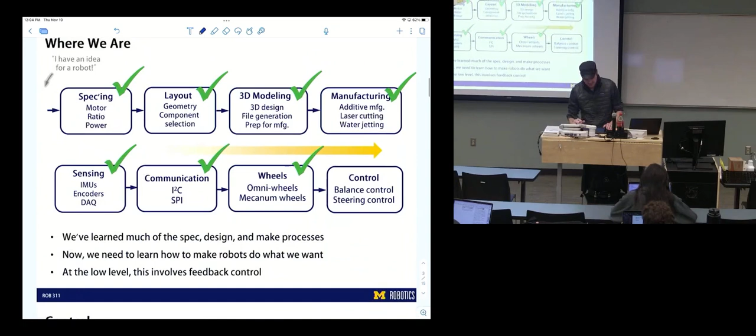All right, this is where we are. This is pretty cool, I like this slide because it shows everything we've done. It puts this whole problem of designing, making, and controlling robots in perspective. We've done all these new things, and now we're talking about control.

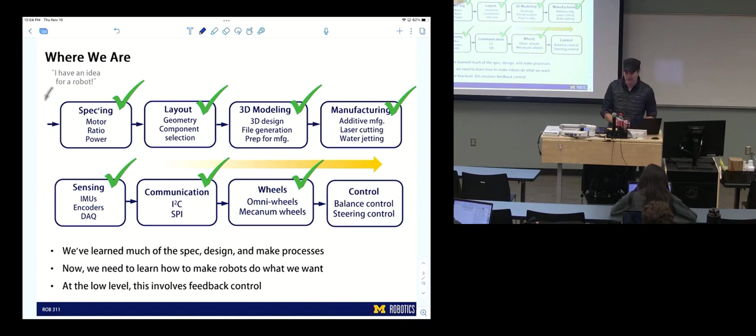We're going to mostly talk about what I'm going to call low-level control. Low-level control is really, what would you say if I say we're going to talk about low-level control, what do you think its job is? It really has one job. What is the job of a low-level controller?

See if I can give you help.

What is the job of a low-level controller? The controller should track the reference trajectory. It tracks references, that's its only job. You give it a reference, its job is to track that reference. What that reference is changes, and that changes the type of controller it is. What you're controlling changes, and that changes how difficult it might be to track a reference. But the game is track a reference signal.

So let me describe that differently. What is the job of low-level control? Track a reference trajectory. What are some examples of tracking controllers? I have four listed.

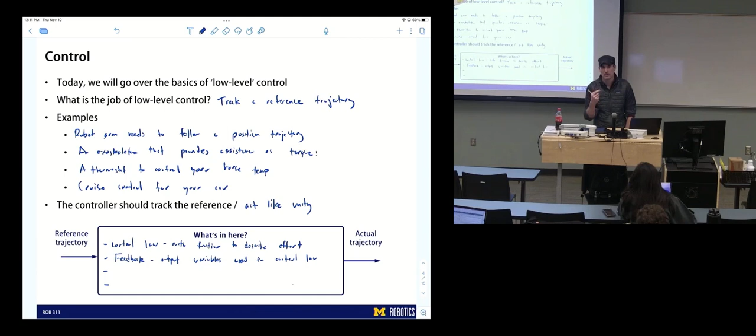Then there's two other things - these two things together are called the plant. A physical process is one, yeah - there's a process and the actuator. So the actuator is what's producing the effort - I'll say the system that produces effort. And the process is the physical system being controlled.

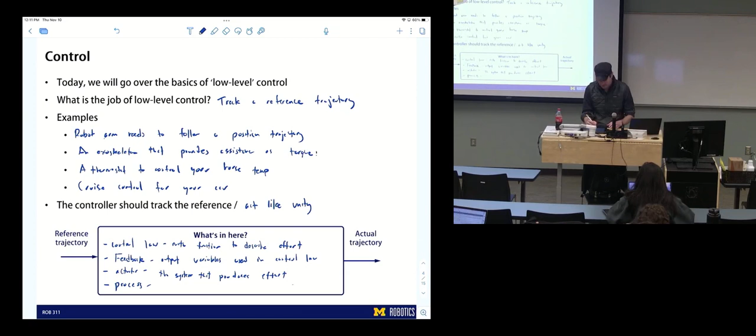Okay, now what do I want? So there's things going on inside this block. This is going to be our controller. What we want is this reference trajectory to match the actual trajectory. That's a perfect controller, so we want all of these things to create a gain or a multiplier of 1. If they do that, it's working well. You track that?

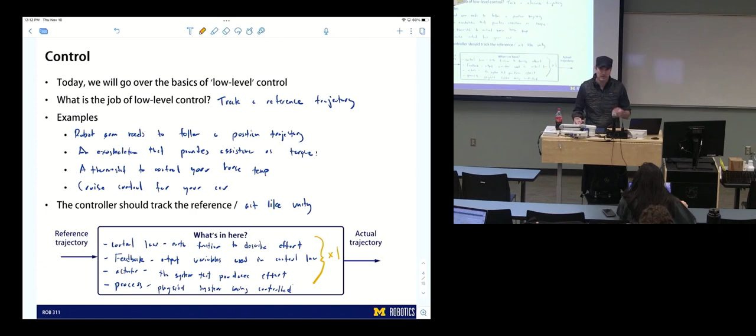Well, I want this to be times 1. Does that make sense? Okay, that's the game. How can we create a system that creates a unity gain under these different types of situations, interacting with physical systems, disturbances?

So why is it hard to make a controller act like 1? Yeah, usually it's difficult to get the transfer function, and on top of that, if you even if you don't have the model, you can still approach it a different way, but you have to know how to do that with Bode plots and everything. Yeah, we might end up going over Bode plots. We'll see how this goes.

I want to say it's hard for it to act like 1 because these systems have delays. They're ordinary differential equations. Those differential equations add delays or lag. So each one of these blocks is an ODE that maps the input to the output.

Let's think of an example ODE, for the actuator. Where would it come from? Actually, let me just write in these blocks real fast. So this is our control law. It's an ODE. This is our actuator dynamics. It's also an ODE. Process dynamics.

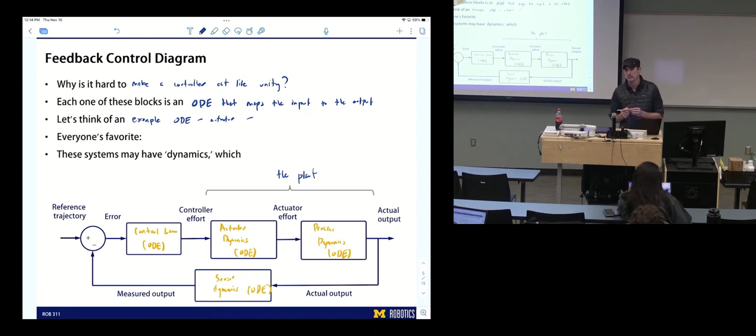Okay, so let's say we want to figure out what is that ODE. What's in that block? What's an example? PID loop? No, what we're talking about here is the actuator, the physical thing that produces effort. We spent a lot of time talking about that at the beginning of the class. What is this ODE? It would be the coupled differential equations, for example, a brushed motor. So that's going to be a set of differential equations that maps a controller effort, that would probably be a voltage or a current, to actual effort, which is going to be torque. So we would get those equations, the actuator dynamics, from our understanding of its underlying governing equations.

How about process dynamics? Where would it come from? What's the governing differential equation that maps an effort to motion? Yeah, dynamics equations that we made for the ballbot. And we have one that keeps coming up. What do we call that? That's a common equation, everyone's favorite. Newton's law. Okay. So this equation is going to be a differential equation that comes from Newton's second law. This is going to be a differential equation that comes from the governing equation of the actuator.

How about what's going on here? What is sensor dynamics? Does that have a differential equation? Does this seem like it fits with these two? Does it seem the same to you, or does it seem different? Who thinks it seems the same? Who thinks it seems different?

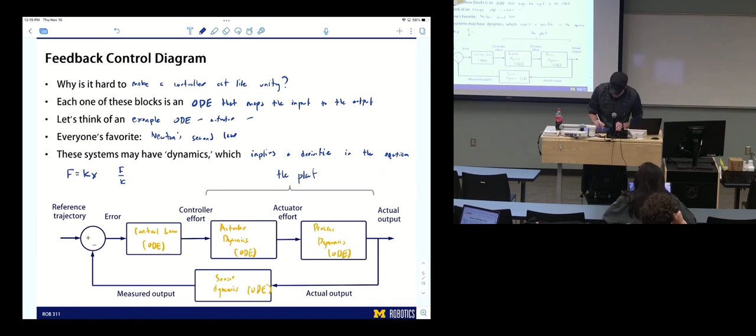Do all systems have dynamics or derivatives? Let's think about the governing equation. We're going to say the process is a spring. The actuator effort is a force. And we want to control motion, we want to control displacement.

Does this system have dynamics? Do they have derivatives? No. So a spring, if we're talking, it's just the force maps directly to the displacement through the stiffness coefficient. So if I force a spring, it's going to respond infinitely fast. It's going to deflect with the same rate that force changes, because there's no dynamics in here.

If we added mass to the spring, and now the spring has mass, then that would add dynamics, it would add delay. But generally in mechanical engineering and robotics, we would say they're massless springs. There's no dynamics here.

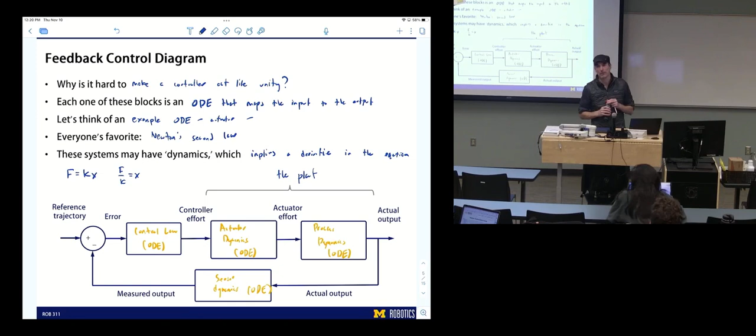Actually, in all physics and dynamics courses I've taken, obviously we assume massless springs, but when you're actually modeling systems in real life that require springs, do you also assume it's massless? Yes. The mass of a spring is usually so low that it isn't worth the complexity. It doesn't really change the answer.

So if I push on a spring, so I'm pushing on the spring, its displacement, does it track perfectly with the force trajectory? Assuming that the spring is the only force, but in reality, assuming a massless spring is the only thing, so if I push on it, it deflects instantaneously. There's no lag between the force and the response.

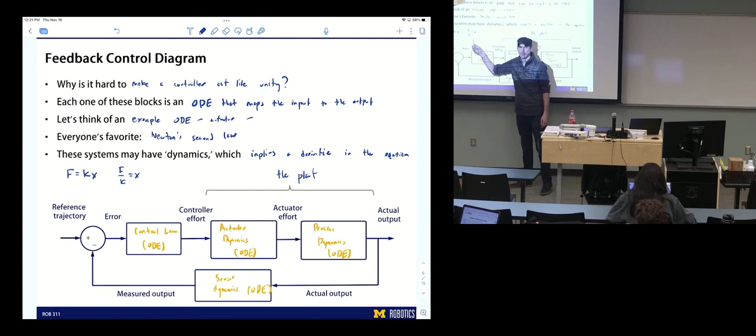Agreed? That's only true for certain systems that don't have derivatives in these equations. As soon as there becomes derivatives, systems start to have lag. Let's talk about that a little more.

This is a concept called system dynamics. We kind of touched on it a decent amount when we were doing the initial modeling. And it comes up more because control is really a ton about controlling the systems, and the system dynamics play a huge role in that. In addition, controllers have their own dynamics and can be thought of through the same lens. So that's kind of why this is coming back up. It's really, really important in the concepts of control.

If a system has dynamics or ODEs, it will often have delays. This usually slows the system down. It can add oscillations.

We can view this behavior, this concept, by thinking about or investigating a system's impulse response function, called an IRF. Who's heard of an impulse response function? How have you heard about it? And what did they say about it? Or what do you recall?

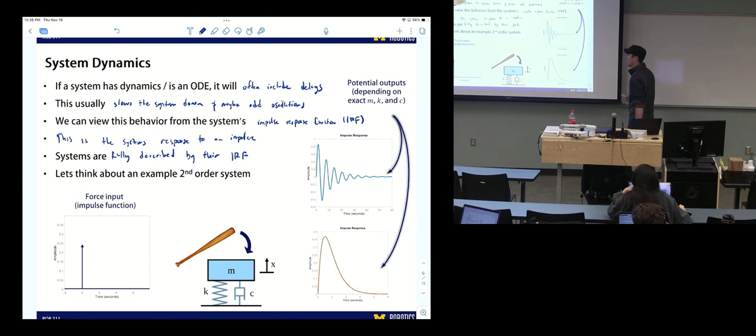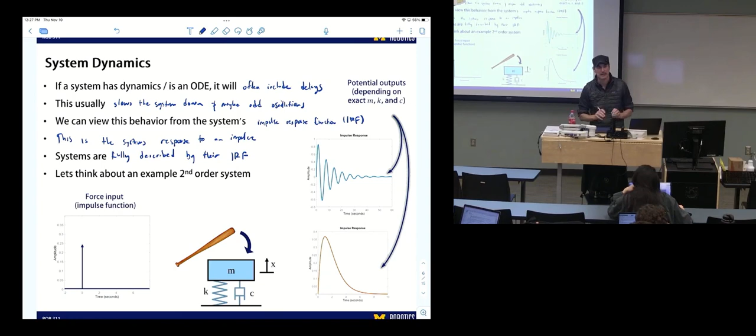So what this has told us is systems have delays. Those delays come from ODEs. We describe those delays using an impulse response function, where that helps us gain insight into the system. And an impulse response function is a key tool to predicting the output, which you won't really have to do, but I just want you to know that.

Okay, so this is our block diagram. I kind of want to go through these, like what these are. A control law is the ODE. I think you guys might know this already, this is kind of like just re-going over the same thing, but I think you guys are tracking it. Do you want me to go through these? It's sort of the same thing I was just saying about what these things are. Do you feel like you know what these blocks are? Who wants to see it again? Okay, let's do it. The control law is an ODE,

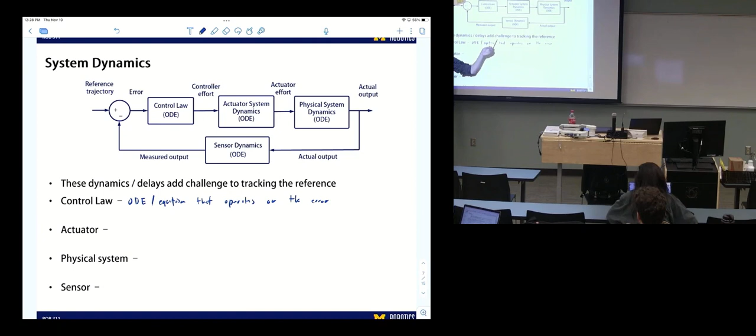Potentially, or not, but it's a math equation that typically operates on the error. In this block diagram, we have our reference trajectory. We're going to subtract our actual value from our reference. That's the error. So that means we wanted to be here, we're actually here. Now we know we're off by some amount. We're going to operate on that error as a set of instructions and then create effort to try to correct this error. That's the general strategy in control. We're always operating on error. We're going to create a strategy here that's just going to try to drive that error to 0. So control law is an ODE, an equation that operates on the error, often includes derivatives.

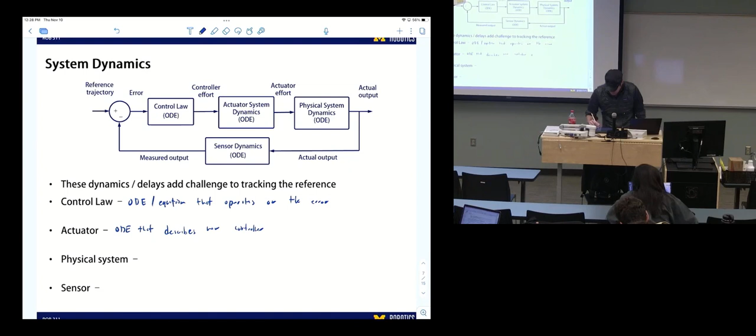The actuator is the ODE that describes how controller effort maps to actuator effort.

Is actuator effort a physical, real thing, or a thing that exists in software? It's a real thing. It's actually effort provided by the actuator. It's going to be torque or force, typically. The controller effort, is that a real thing, or is that something that exists in software? Software. I'm going to say it's both, because controller effort will be computed in software, but you'll also have something that you're sending out. A PWM signal, a torque command, a duty cycle, you have some physical thing that's going out, and then error. Software, that was only software. It only exists. You're going to compute it, you're going to operate on it, and then that's it. This is a real thing. Actually, your output is a physical thing. This is the measured version of it.

So going from the controller effort to the actuator effort, is that encapsulating all of taking whatever the controller, like PWM or whatever the controller gives, converting that into a voltage and current to give to the motor to move it, which will cause the torque or the force to happen? It would be the actual voltage or actual current. This signal would be either, usually it's a PWM signal, so usually it's a voltage value that's changing here.

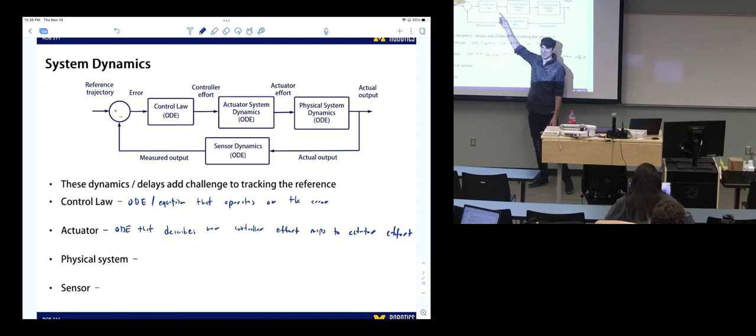So the controller effort would be a voltage value that changes. It does that conversion beforehand, and then the actuator system receives it and converts that into the actual torque. The controller effort is received as a voltage, and it has to convert that voltage into an effort. That comes from Kirchhoff's voltage law and your motor equations, which convert voltage into torque current.

So the control law is software. The actuator system dynamics is a real physical thing. The physical system is a real physical thing. And the sensor is a real physical thing. The error is something you compute in your software, but you won't actually see it.

Physical system, this is our ODE that describes how actuator effort is converted to motion.

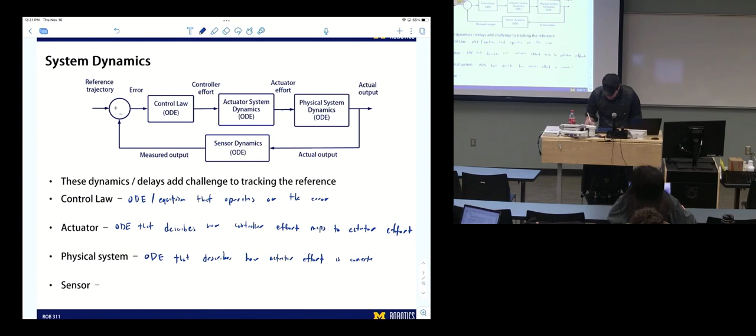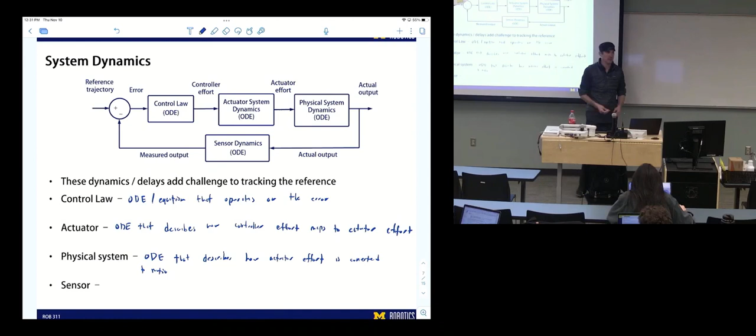My iPad just restarted, let's give it a sec. I can't actually use it right now, but the sensor is going to be the ODE that maps the actual change into the real change, or the real change into the measured change. While that's going, I'll just switch to my actual notes, and hopefully it'll come back. Oh.

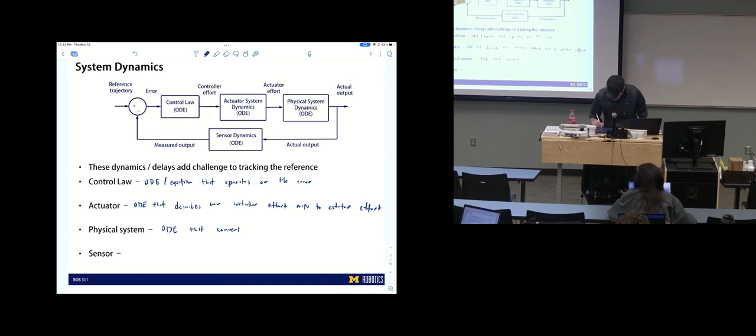Yay, all right, we're back. Okay, we lost the physical system. ODE that converts actuator effort into motion.

Can an ODE just be any differential equation, or are there specific parameters that describe it? That's a good question, I think you can generally think of it as specific parameters, although that'll be a good enough approximation. Are there certain differential equations that classify as ordinary differential equations definitely? That's a class of differential equations, but if you're thinking about what those dynamics represent, they might represent a set of dynamics that can be easily described by an equation, or something that's not so easily described, something that really exists as a function, as a frequency response or an impulse response function only.

The sensor is the ODE that describes how the output is measured.

Can you think of an example that illustrates how sensors can have dynamics? How about a microphone, or a speaker. We'll think of a microphone, it's a sensor. A microphone senses vibrations and converts sound vibrations into a voltage. Imagine at some point the mass of that microphone system, which will be a coil and a magnet, will start to eliminate or be slower than what is potentially being heard by the microphone.

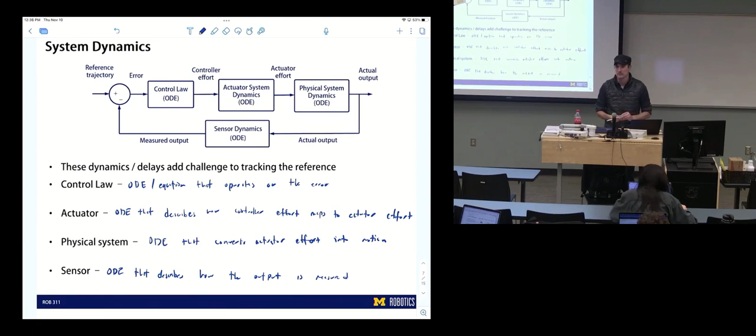Does that make sense? Does that kind of help? Would you consider, like in an IMU, the spring damper systems that measure displacement, would that be considered the dynamics of the sensor as well? Definitely, yeah, same exact concept. Anything that has mass is going to eventually have a bandwidth issue.

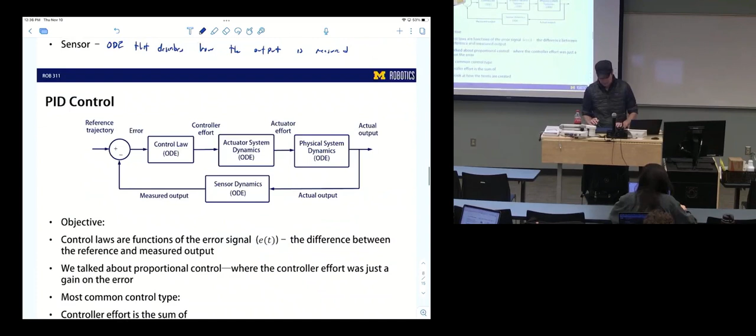Okay, so let's go back through this. The objective of our controller is to track a reference. It does that by driving error to 0. If error is 0, what's the gain of that system? 1. So anytime error is 0, the system has a gain of 1, agreed? It's doing its job. Anytime error is not 0, the system doesn't have a gain of 1 and it needs to catch up. Make sense?

Control laws are functions of this error signal, E of t, which is the difference between the reference and the measured output. Everything operates on that error. In lab, we talked about a proportional control type, where we mapped the effort of the balance controller proportionally to its lean angle. That was easy to do because it was trying to track a lean angle of 0, so all we had to do was take a gain, multiply it by the lean angle, and we got our controller effort. That was proportional control. There are also other types of control.

We're going to go over the most common type ever, which is called proportional integral derivative control, or PID. The controller effort for PID is the sum of 3 terms, one for each. Let's look at how these terms are created. Who's already very comfortable with PID?

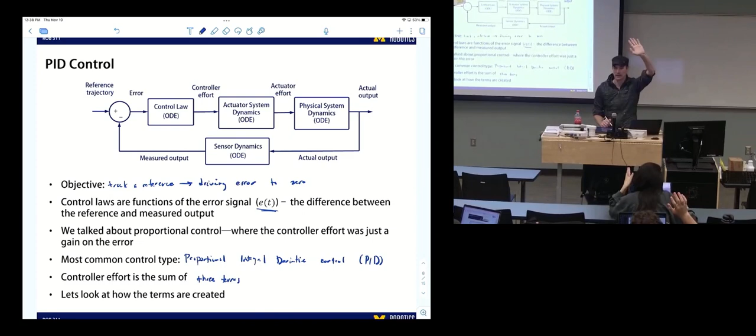Okay, cool, about half the class. That's not surprising, that's okay, it's a really common concept. But for those of you who are not as comfortable, we're gonna go through it.

Okay, so we have our block diagram up here, like we talked about. I've defined a couple of variables: error being E of t, the reference trajectory being R of t, and the output being Y of t.

So the proportional gain term is just this. The U is our controller effort, so UP is the part of our controller effort that comes from the proportional term. It's going to be KP times the error, just like we talked about for our ballbot. The error may, if you're not referencing 0, have to have 2 terms in there.

It acts like a spring, a virtual spring in position control. So that should help you understand: if I have a controller doing position control and its reference is here and I deflect the system, it's going to try to bring it back. It's going to drive that proportionally. That's going to come from this term.

The integral term is the integral of the error scaled by ki. So the u of I, this is the controller effort from the integral term. It is ki, its gain, times the integral of the error term.

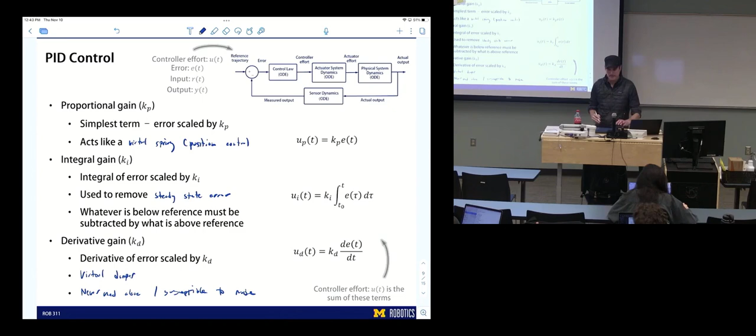Okay, this is a quick little example for us to do. What I have here is an example reference and an example output. What I want you to do is build the 3 controller effort terms and then create the total. It will take like 2 minutes to do this.

I'm going to try to get to this mallet example, I think we'll get there. I think we should do this, so I want you guys to create these. You should have 3 different curves. Those curves sum to a curve there, and we can talk through it. This will just take like 2 minutes.

I'm just saying, think of these gains as 1 for this little example. So r of t is what we're trying to do and y of t is what's actually happening, is that correct? Correct. So r of t is your reference, Y is your output.

Everybody should do this. If you cannot do this, then that would be an indicator that we're not where I want us to be. I'm hoping this would be relatively straightforward for you.

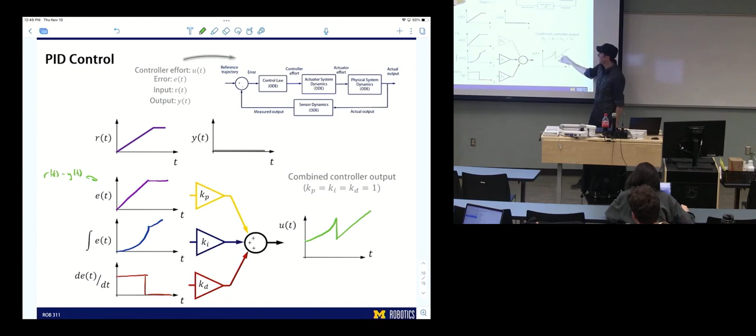So this first half is like the D term is steady, so that's why it doesn't start at 0, it starts where D starts. Then I kind of just combined these, but I tried to make it look a little steeper than this. It doesn't look like that, but that's the plan. Yeah, so this would be the combination of the purple and the blue. It's gonna make something like a parabola, but a little steeper, and then drop, and you have that linear increase. Yep, that's right, awesome.

So this is assuming that none of this is actually being applied to the system. Correct. So theoretically it wouldn't really look like this in reality, because you would have been applying feedback to it for it to rise up. Yeah, this is an inverse simulation. In actuality, it would be forward, so the u of t would have an effect on y of t, and that effect would have to go back into this calculation, but for this example, we're not talking about that.

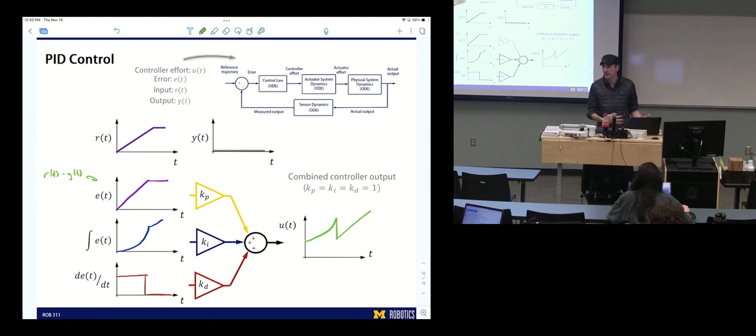Does everybody track what PID is, kind of where it comes from, how maybe you would implement it? Let's talk about how we would describe how good it's doing, how well your system is being controlled.

Okay, so coefficients, your P, I, or KP, KI, and KD, have to be adjusted, and that process is typically called tuning, and it's done iteratively. It's often, or maybe not always, but often done using a step response.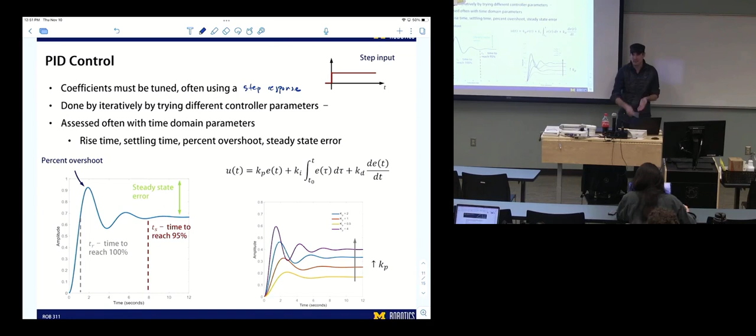A step response is the system's response to a step input. It's a really common way to assess how well a system can track a reference because it's high frequency, it's discontinuous, there's an immediate jump. That helps you see how well your system responds, how quickly it responds, and then you can see it kind of settle out. A step response would be sort of similar to, or analogous to, an impulse response.

There are these classes of responses that are used over and over in system dynamics. Step response would be one of them. We're going to use it to view our system and how well it's tracking, so adjusting our controller parameters—KP, KI, and KD—that's called tuning. You can assess them in the time or frequency domain. This class will talk about the time domain.

The way we would assess a system, how well it's doing, is by these kinds of variables: rise time, the time it takes to reach 100%; settling time, the time to reach 95% of its final value; percent overshoot, the amount it goes over the top of its steady state value; and steady state error, the difference between the reference and the actual value at time equals infinity. These are the kinds of things we'd use to talk about how well our system is doing. This is our vocabulary for assessment.

How fast does it rise? How fast does it settle? How much overshoot does it have? Oftentimes, if you're building a robot, you're gonna have some goals for this. These constraints—what do you want for this—will typically come from you. You might think of an example constraint that you might see when solving a problem.

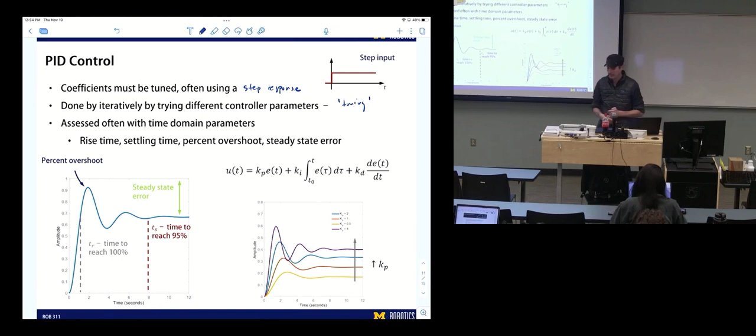So let's say we have a D term, and let's say I give a system a step response. What's it gonna do? Let's say it's only a D term—say I give a system with only a D term a step response. What would happen? It would basically kick forwards, and then it would stop. You would see that discontinuous jump as a kick forwards, and then that'd be it.

Okay, so let's talk about how you might adjust these parameters. We've talked about these controllers—they need to ideally create an overall system gain of 1. That's challenging because of disturbances, delays, or dynamics in systems. So we created this control law that had to do with driving error to 0, which would indeed make our system gain 1. But now we need to know how we actually tune the coefficients in that control law to drive error to 0.

There's no right answer to this. There are common best practices, which is what we're going to learn, but there isn't really a right answer to tuning a PID controller. It's really up to you.

The most common control tuning strategy is developed by Ziegler-Nichols. If you're interested in knowing that, you can click on that link, it'll take you to the Wikipedia page. We're not going to learn that formally. I'm going to give you the Cliff Notes version.

So when I'm tuning a PID controller, there's usually 3 steps. Does anybody know the first step? Start with the P gain and get it to rise up to the point where it at least hits the target, whatever it's called - the reference. Yes, so step 1 is increase KP.

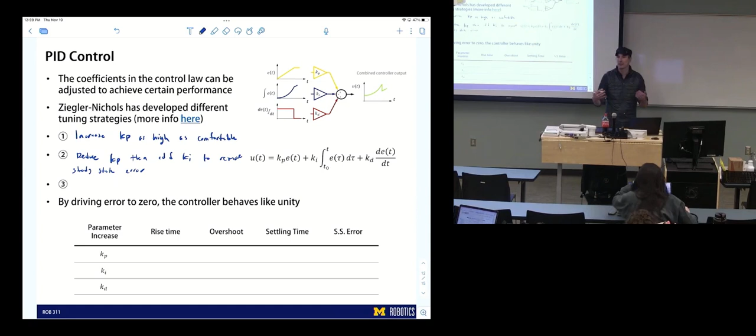So once you've done that, you usually have an idea of how much error is produced, how much effort is produced. You begin to see what your system can take, how much effort it can handle. I would do this even though I know I'm going to reduce it, just to see how the system responds and get an understanding of how much effort is going into that response, then I would add it. But you could shortcut it if you're proficient in this.

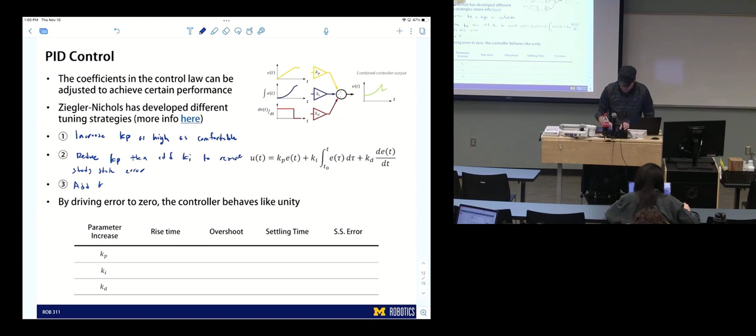Step 3, add KD to remove oscillations. By driving error to 0, the system behaves like 1.

Okay, so now I want to go through this little chart, and I want you guys to tell me what the answers are here. So I'm going to talk about increasing KP, increasing KI, and increasing KD. I want you to tell me the effect on rise time, overshoot, settling time, and steady state error. Not all of them have a strong effect on all the parameters, but we'll do it together. Rise time - what's rise time?

How quickly it passes its desired value - that's rise time. So if I increase KP, what happens to rise time? It decreases. What happens to overshoot? It increases. What happens to settling time? It does increase, a small increase, but not as fast as everything else. Steady state error - if I increase KP, what happens? It decreases.

Does that make sense for steady state error? Imagine KP is essentially a spring connected to the target, to where I actually am. As I increase KP, that spring draws closer and closer. Will it ever reach? No, it wouldn't. So a P-only controller will never have zero steady state error.

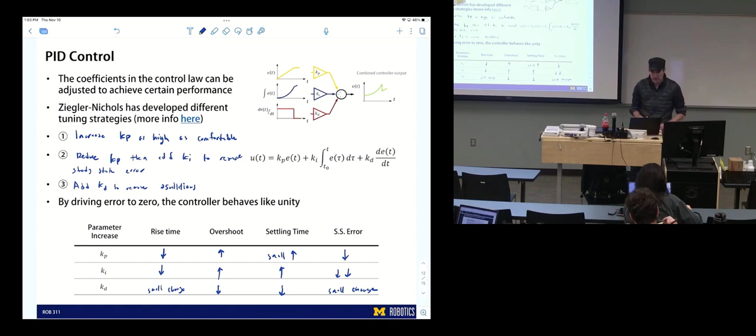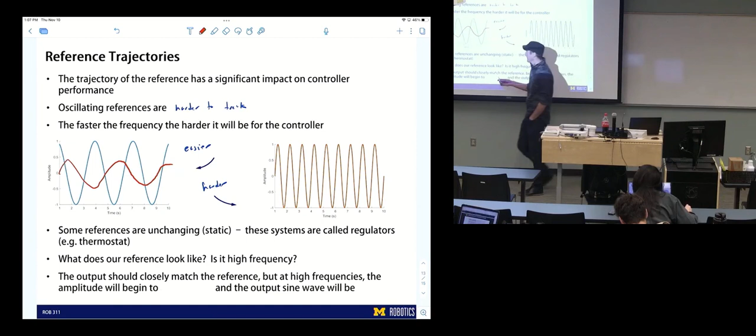Something like that, I try to draw a phase shifted, reduced sinusoid. So hopefully it makes sense that if I give it this blue reference and the system is not tracking well, or the frequency is too fast for the system to track, what we're going to see is a reduction in amplitude and a phase shift of the sine wave. Agreed? Okay, that makes sense?

Yes, but is the output necessarily a sine wave, or could weirder things happen because it's really bad? If the input is a sine wave, the output is a sine wave. That's a property of a linear system. In this class, we'll focus on linear systems.

Okay, so that's kind of what's going on here in this last bullet. The output should closely match the reference, but at high frequencies, the amplitude will begin to attenuate, and the output sine wave will be delayed.

This is kind of the downstream effect of the system dynamics we talked about at the beginning of the lecture. There's a ton of technical infrastructure around assessing these concepts, these are frequency domain concepts, which we may or may not talk about, but there's tons that goes into this. So just knowing this is something you might observe, something a lot of people care about in robotics, that's probably good enough for this class.

Okay, what I want to do now is talk you through an example of the PID example that I wrote up in MATLAB. I'm going to tune it with you real fast, and then we'll see if we have time to do it first. So for right now, just hang with me, don't get out your computers.

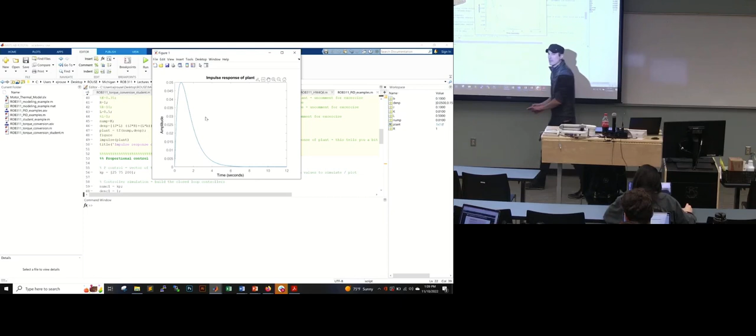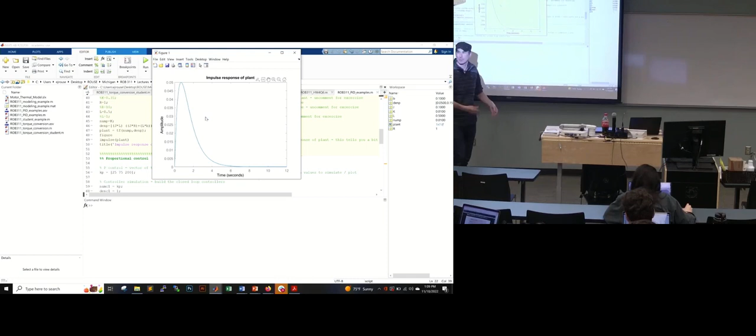So this is creating the plant, the system that's going to be controlled. And it should plot, so this is the impulse response of that plant. I'd like for you guys to get a general feeling of, when you see an impulse response, kind of what that means. This is saying you can get some understanding of the system by looking at how it shifts and decays following an impulse. So I have it plot its impulse response, that's the impulse response of the plant.

Here we're going to do some proportional control, so I'm going to run this section. It's going to do three different controllers, they're all KP, so they're all P-only controllers. But it shows how the system, as I increase KP, gets closer and closer to the actual value, but it starts to oscillate more.

Make sense? Is he tracking that? Are we controlling to 1? Yeah, step response goes to 1. Unless you scale it, the step response is defined to go from 0 to 1.

So if you wanted to mess with those, you would just edit those here. Those are proportional gain values, you can change them. Just keep in mind that I hard-coded them into the legend, so if you change them, just know your legend will be wrong.

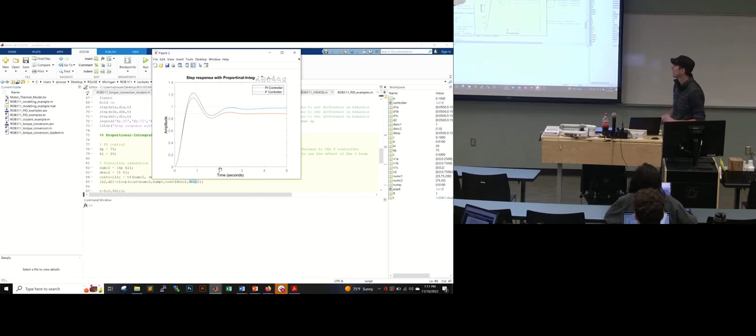This is our proportional integral term. So this shows one of the P controllers from the last cell, and then the addition of the I controller, the I term. You can see the I term immediately removes that steady state error, and it rises a tiny bit faster. Make sense?

Now let's try PID, so that's the last cell. I have them all as 0 right now. So what I want to do with you guys is sort of tune it for a minute.

And then up in the top, in the definition of the plant, there's a bunch of things that say inertia, uncomment for exercise. I want you to comment out the inertia I'm using and uncomment this inertia, and do that for all the parameters shown. So I'm basically changing the plant and having you redo it. That's the game. So before we do that...